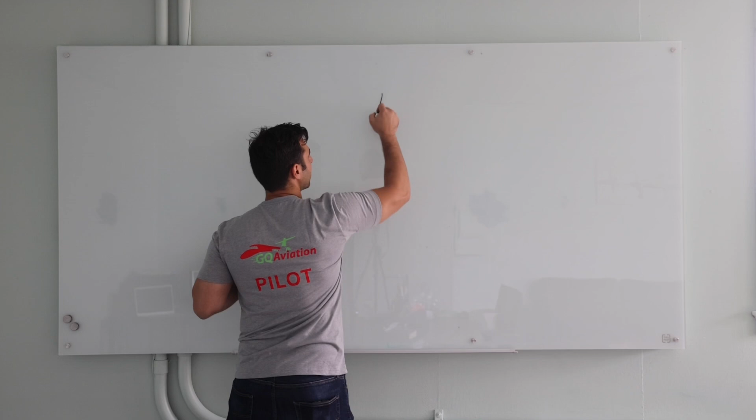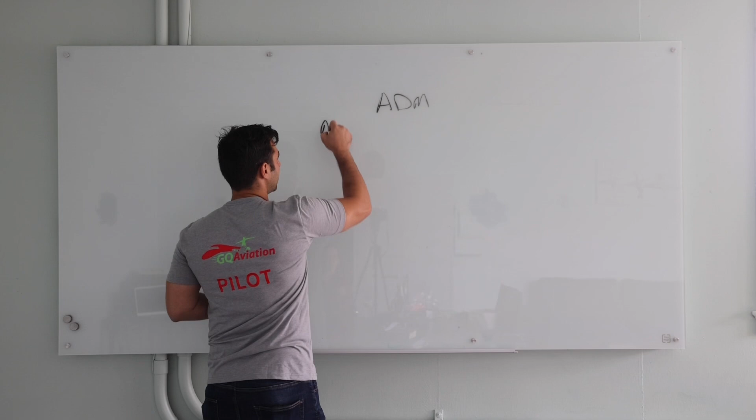Today's ground lesson is going to be about ADM. Just a heads up, there's an acronym for everything in aviation, and ADM stands for Aeronautical Decision Making. I'm going to write that down because it's important.

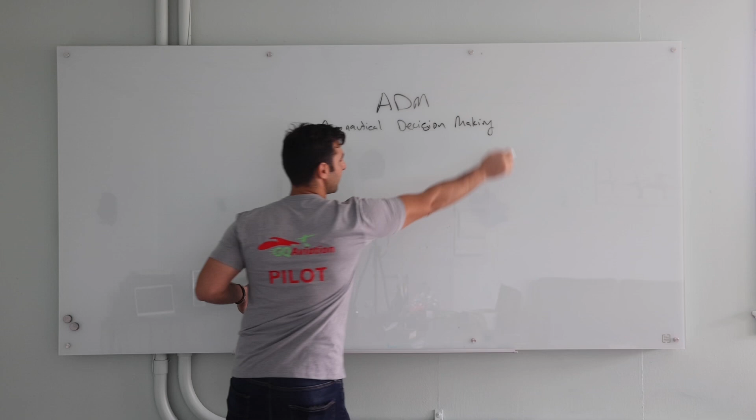Aeronautical decision making is basically your go or no-go decision. Are we going to fly today or not? How do we know if we're going to go fly? What factors come into play? What considerations do we have to take? When we go flying, we have to think about things like us, the aircraft, outside, restrictions, weather. But to put it all in one word, there's an acronym for that. We are going to use the acronym PAVE.

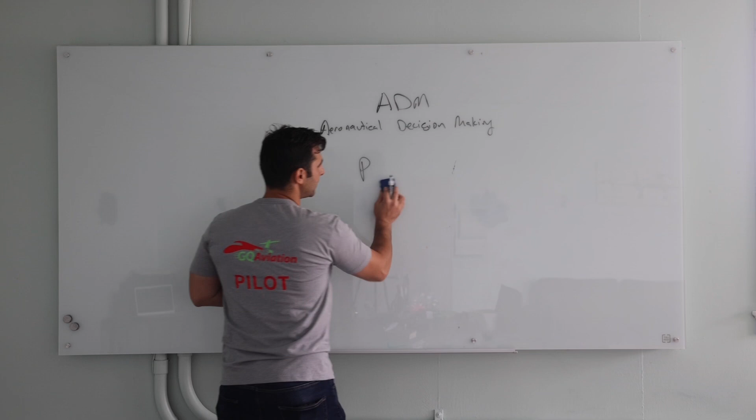Before you come to fly, run this acronym against yourself and against the factors that are out there, and then make the decision if you should fly that day or not. Let's start with the P. The P in PAVE stands for the most important person, which is pilot.

You're going to run an assessment of yourself to know if you are fit to fly that day or not. There are different factors to think about, but to make it easy we also have an acronym for that, and we call it I'm Safe.

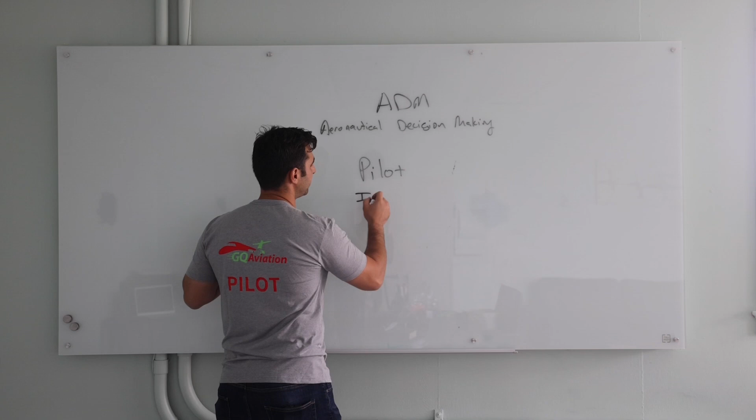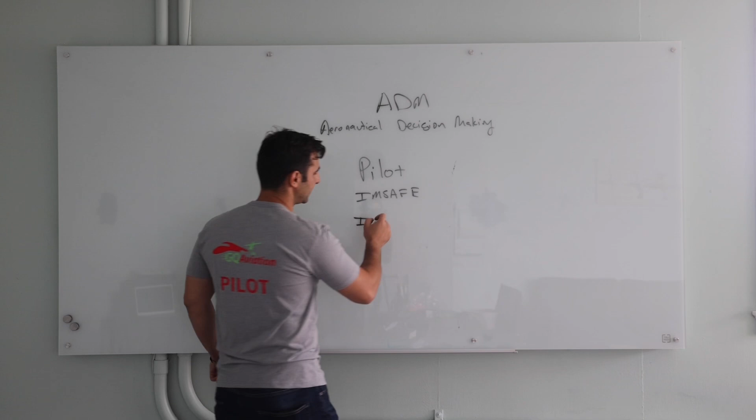This is I'm Safe vertically, but we're going to list it horizontally. The I stands for illness. So if you're sick and you think you could handle it on the ground, you might not be able to handle it in the air.

An example of this: if you have some sinus pressure on the ground, you might be able to deal with it, but as you get into the air with lower pressure, it might start hurting even more. When you're training, you'll always have an instructor there to back you up, but you don't want to get into the habit of testing the limits. If you're sick, you know you shouldn't be going out. Flying the plane is not the best decision to make. The M is medication.

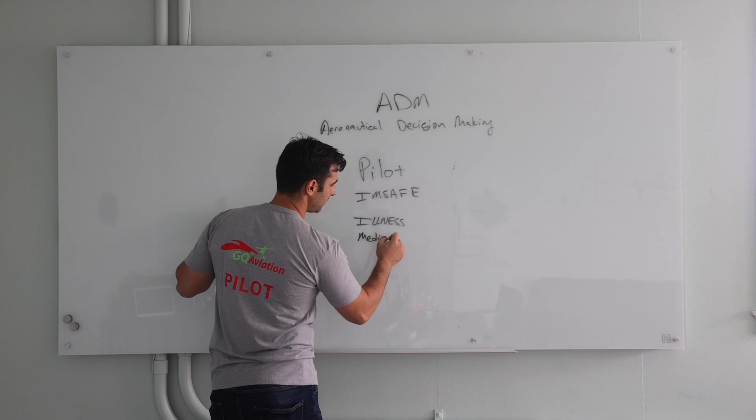There's a list of medications that the FAA does not want you flying with. You want to look those up, and if you think you're on one, you probably shouldn't be flying. Other than that, if the medication says do not operate heavy equipment, you probably shouldn't be operating an aircraft, even though these small single-engine aircraft are probably not as heavy as your car.

But if you think you normally take a medication and you're fine with it, and it says it causes drowsiness but you never get drowsy, when you get into the sky that might change. So you don't want to risk it. If you're on a medication that could adversely affect your abilities to control or handle an aircraft, don't go flying.

S is stress. Talking about stress will lead up to this: let's talk about accidents. Normally most accidents in aviation happen because the pilot made more than one small mistake. So it's normally not a big mistake, it's normally a series of small mistakes.

As a new pilot, and as a pilot in general, if you come in stressed out and take the aircraft and you have a small issue, such as an alternator going out, which is not a big deal, you have about 20 minutes to get it down on the ground. But you might forget about that and make another mistake thinking about this, and then one mistake leads to another, and then maybe to an unfortunate incident or accident. So if you're stressed out, the place to blow off steam is not the aircraft.

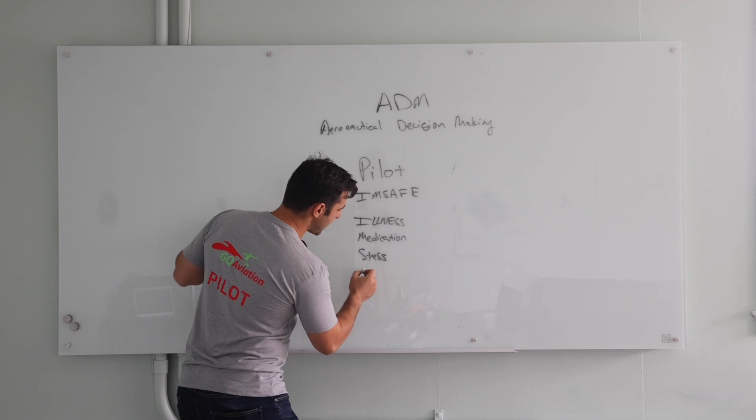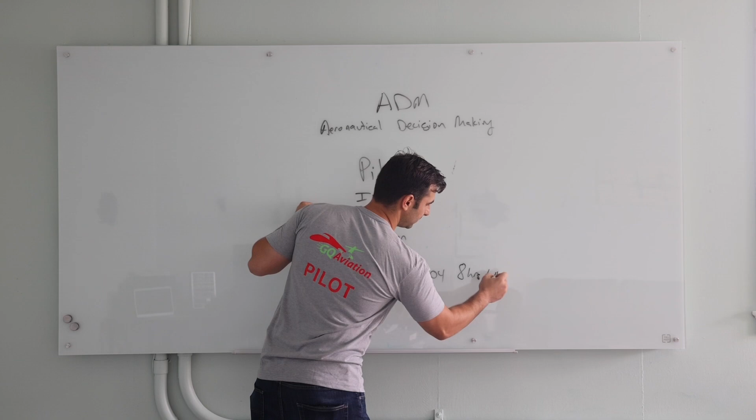A stands for alcohol, which is self-explanatory. But the FAA wants you to know that your blood alcohol content cannot be more than 0.04. We also have a saying: 8 hours bottle to throttle. So from the last drink, you've got to wait 8 hours before you can operate an aircraft.

Taking this a step further, if you're in training and you're hungover, you probably don't want to come. Training gets expensive, and if your instructor doesn't pick up on it in time and you go flying, well, you're spending hundreds of dollars and it's probably going to be a waste of your time. The instructor will have to turn the plane around and bring it back, and you'll need to wait for your next lesson to restart.

The F is fatigue. We're going to talk about fatigue: if you're tired or hungry, solve those two situations before you show up to fly. If you're tired, get a nap, get some sleep in. If you're hungry, grab a bite. A cranky person in an aircraft is not the best of people in a plane. It's supposed to be a good time, so feed the belly.

And the E is emotion. When it comes to emotion, be level-headed when you come into the aircraft to operate. We want a level environment, just to keep it simple. Run this checklist against yourself before you show up. As long as you do not abuse this checklist, your instructor will understand if anything comes up, even if it's last minute. Bring it to our attention, and you call out of the flight.

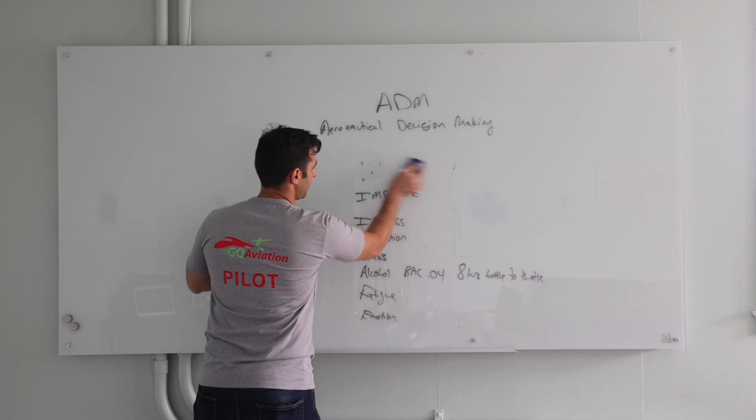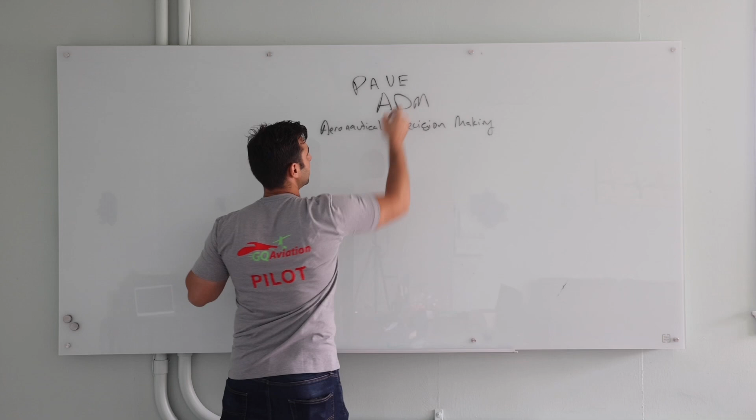So I'm going to write PAVE up here, that way we don't forget it. The A in PAVE is going to be aircraft, abbreviated AC. When it comes to the aircraft, it should be properly inspected, legally inspected. It should be in good condition before you come fly it.

Any normal person walking up to an aircraft will know, even if it was supposed to be inspected properly. If it has a low tire or a flat tire, you know that it's not going up to fly. If it has a dent in the wing or open panels underneath the wing, or if there's a leak next to the wheels, it should be inspected by a mechanic before you go. So take a look at the aircraft, make sure it jives for your flight, make sure it looks safe, and even after you start it, make sure your run-up jives.

Don't scratch anything off just because 90% of the time you showed up, it was a good aircraft, and now this one gauge is low, it will be fine. It won't be fine. Let a mechanic say it will be fine, then come and take it. Planes are a dime a dozen, so you could just come, park a plane, and take another one. We want to be safe here. Other than that, let's talk about the inspections the plane needs to have.

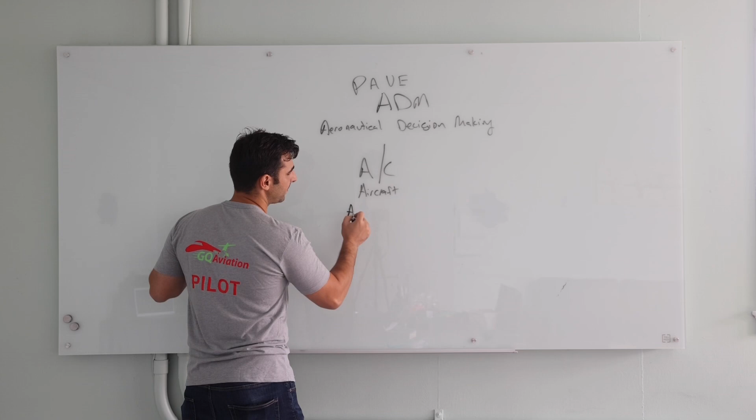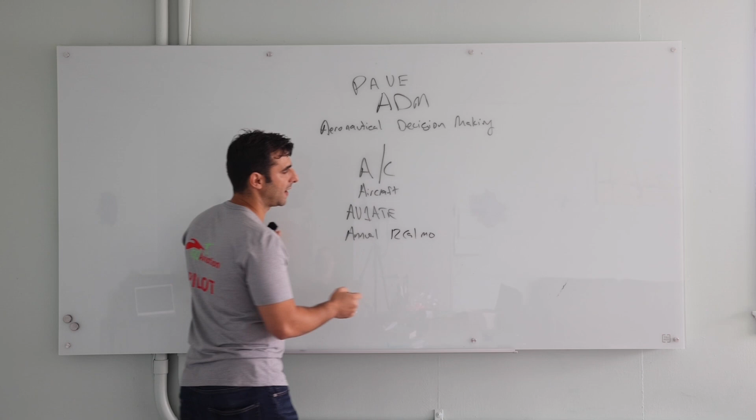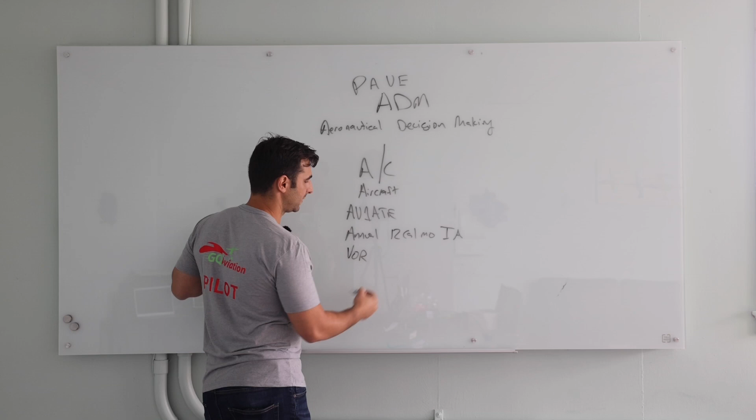It comes in an acronym, and it's called AVIATE. The A stands for annual. Your aircraft needs to be inspected every 12 calendar months by an inspection authorization. That's a type of mechanic in aviation. The V is a VOR check. It's navigational equipment, your VOR receiver. And this needs to be inspected every 30 days.

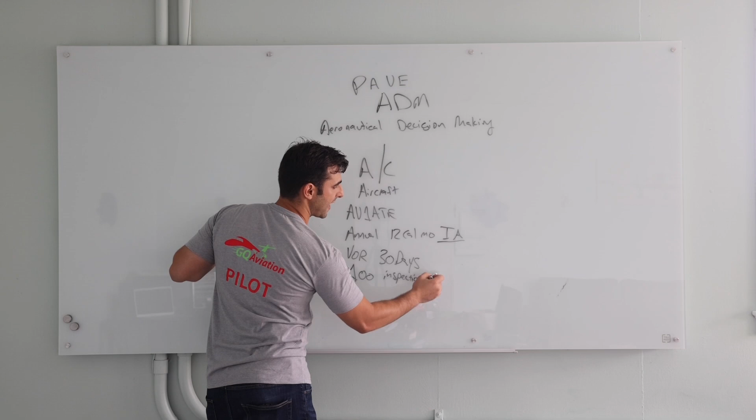The I is actually a 1, and it stands for the 100-hour inspection. This can be done by an IA or an A&P. And an IA is an A&P. A 100-hour inspection needs to be done every 100 hours the plane flies, and only if it's for hire. So if you own your own personal aircraft and you just fly personal trips, nothing for work, you're not renting the plane out, the plane's not on a charter service, you do not need to do this. But it is a good idea that a mechanic sees the plane every 100 hours.

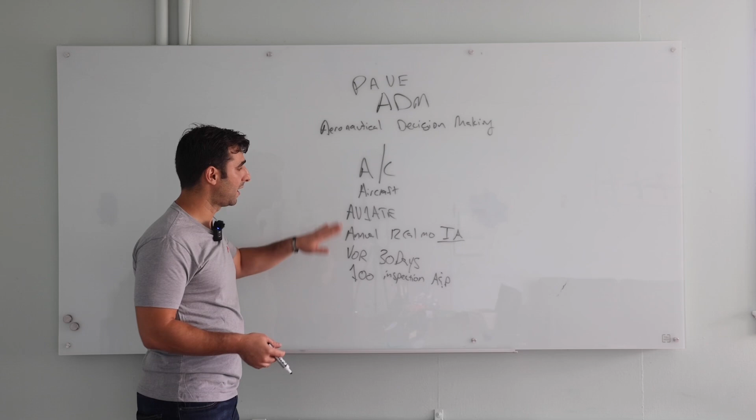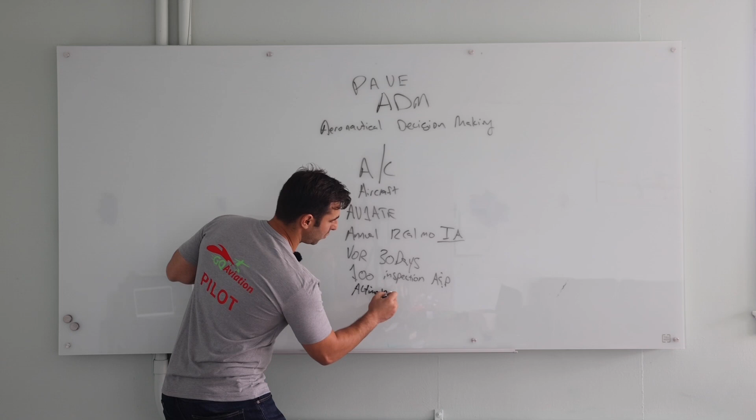A 100-hour could be included in an annual. So if an annual is signed off, they'll normally sign off a 100-hour. But it won't happen the other way around. If a 100-hour is signed off, an annual is not signed off. After that, the other A is altimeter, which is actually the pitot-static system. And this needs to be inspected every 24 calendar months.

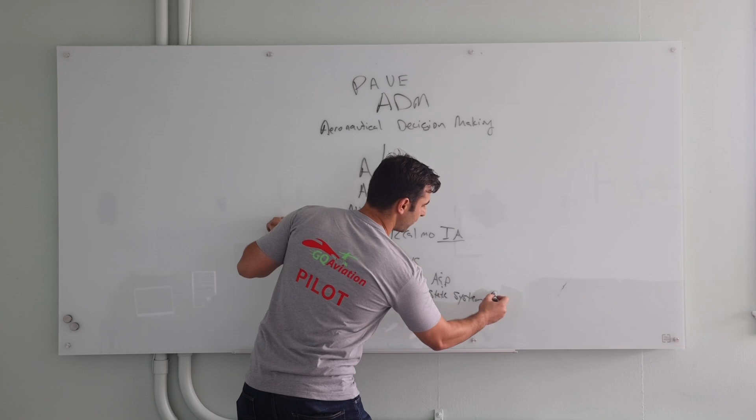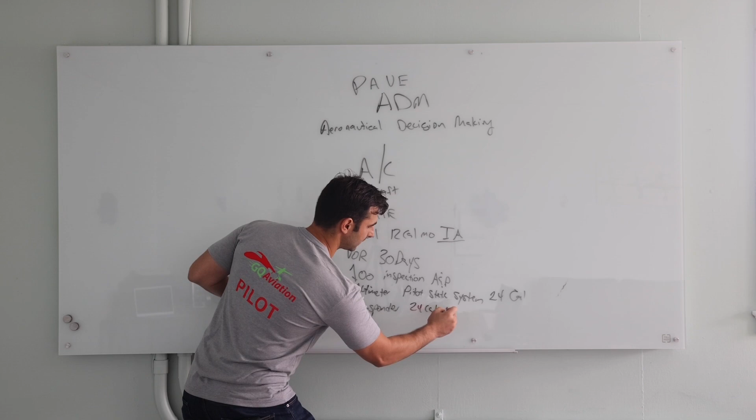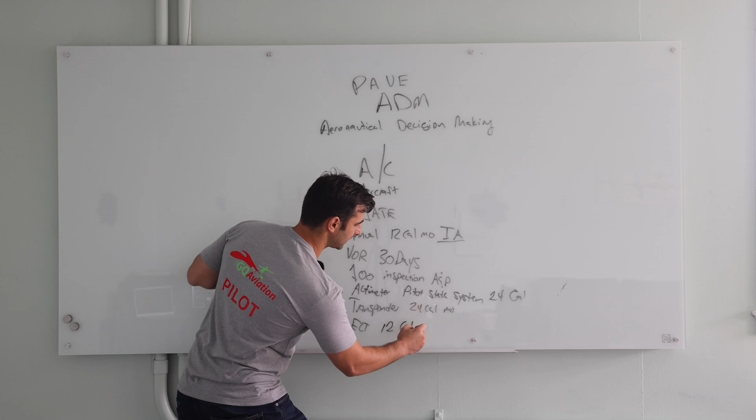Then you have the T, which is the transponder, which also needs to be inspected every 24 calendar months. And we have the E, which is the ELT, an emergency locator transmitter. That needs to be inspected every 12 calendar months, and the battery replaced as necessary. The battery needs to be replaced either at the expiration date or whenever 50% of the battery is used, whether it was actually used or for testing. If you drained it halfway down, you need to replace that battery.

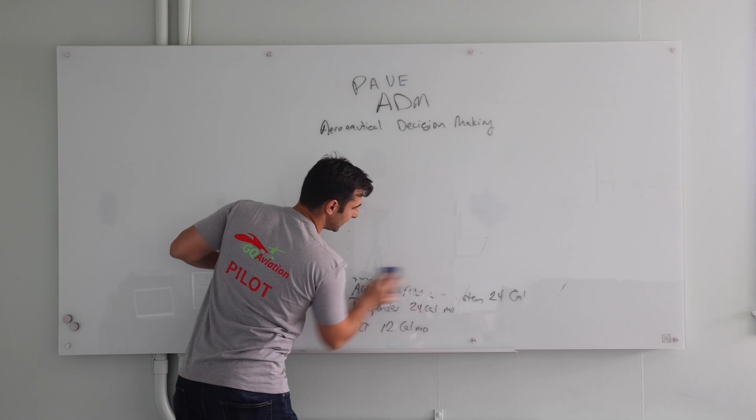So these are the inspections that the aircraft requires. Now, if a mechanic tells you they're done, but you walk up to the plane and there's a discrepancy, a piece missing, or a big piece missing, leave that plane alone, walk back, and get another plane. So that's the aircraft. The V in PAVE is actually for environment.

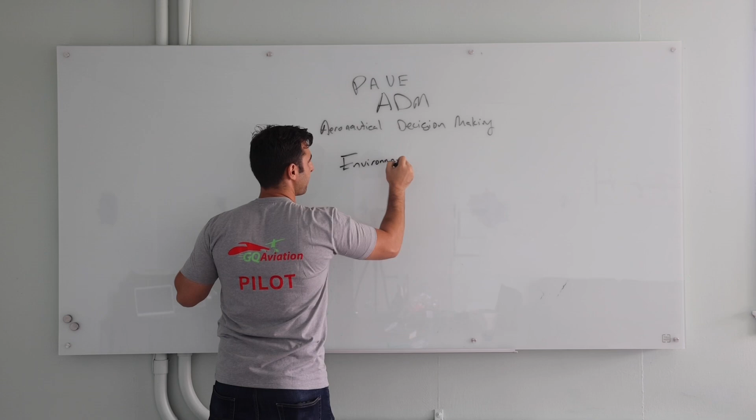Now, what can the environment include? It could include the big one, which is weather. Should we be flying in this weather? Today, we do have a rainy day. It's cloudy. If you're not instrument rated, it's probably not a good idea to go flying today. If you are instrument rated, but not proficient, it's probably not a good idea either. But let's assume that we're just VFR pilots, basically only flying by what we see visually outside. It's clear that we're not going to fly today.

But if we show up and the cloud deck is lower than what we personally feel comfortable with, which is our personal limitations, maybe we won't go. Maybe I'll set the standard for myself to fly only if the cloud deck is at least 3,000 feet. Also, if there are winds I'm not comfortable with, and I only have one runway, wind coming off the side will create a crosswind. I'm not comfortable with a crosswind of more than 10 knots, so I won't go fly that day. Other than that, the other normal weather phenomena. But taking it a step forward, what if there are restrictions?

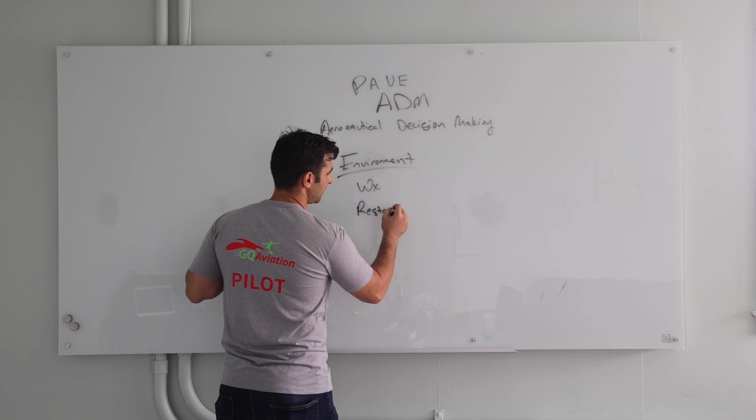Restrictions in the area. Some restrictions you can fly through if you know how to navigate them or if you know how to get the proper clearances. If we're not comfortable getting these proper clearances, we probably shouldn't be going that day.

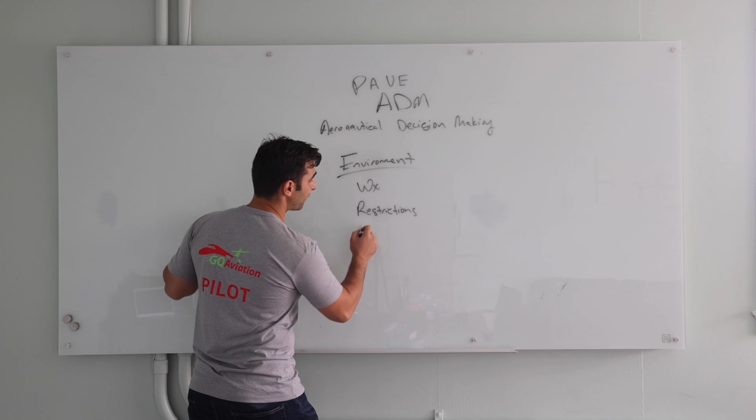Performance of the aircraft. Now, are we taking off of a shorter runway, a smaller runway? Do I feel comfortable clearing this obstacle? Am I around mountains? Do I feel comfortable with the environment of the airport itself? Am I leaving a Bravo or a more busy airport? Should I bring somebody with me to help me out?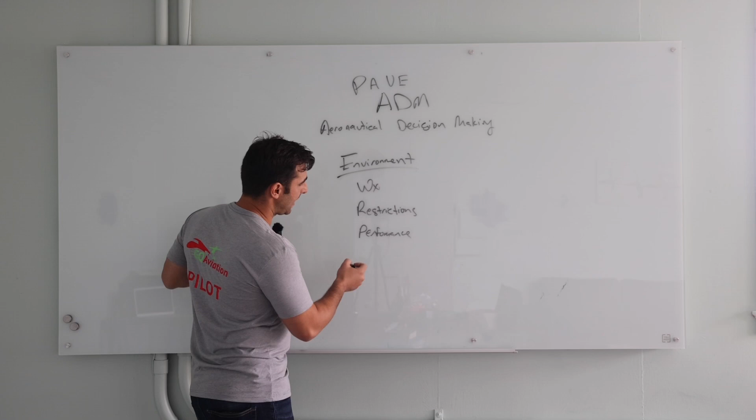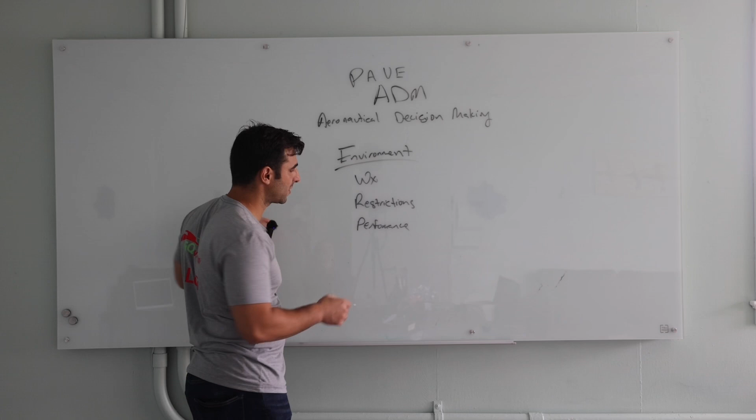So we want to take into consideration the performance of the aircraft. Can I clear maybe an obstacle at the end of the runway? Do I feel comfortable doing it myself? You want to take into consideration your own capabilities. Well, there was one more that I wanted to say. Coming back to the environment and sticking it together with somewhat of the aircraft, let's include aircraft in environment as well.

So let's say we have a new aircraft. If we're not familiar with this new aircraft, if it's not similar to the ones that we used to fly, maybe we want to take somebody with us and make the environment of the aircraft more comfortable for us. Not necessarily an instructor at that point if you're a full-on pilot, but perhaps somebody that's flown the aircraft before, that's familiar with the systems and how to operate the aircraft, and to give us pointers on that. But if you do need, or if you do feel more comfortable, take an instructor with you.

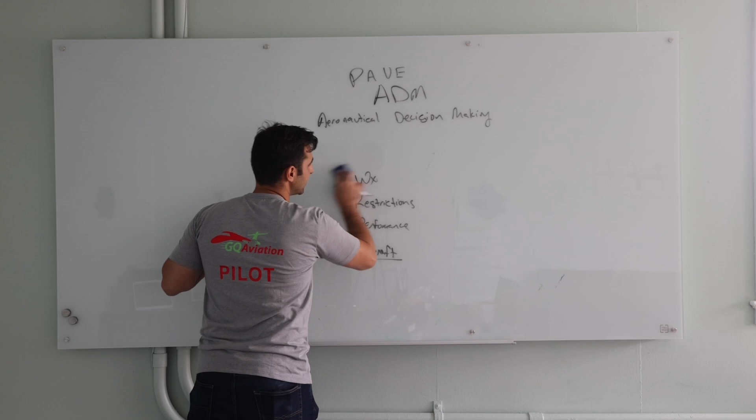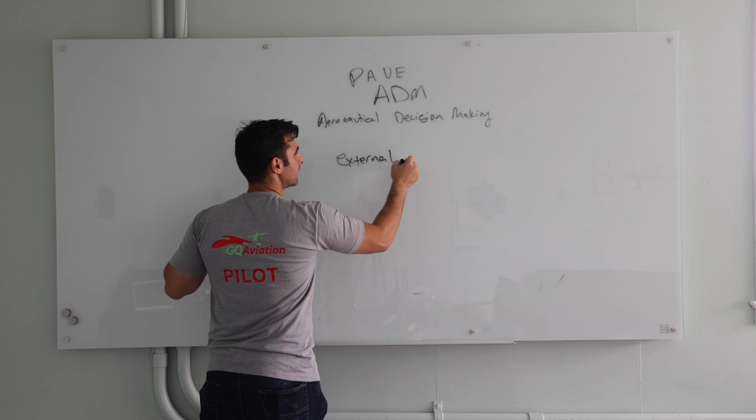So that's environment, and anything else that you can think of about the environment that might adversely affect your flight for that day. The last thing on PAVE will be the E, which is external pressures. Now, a lot of people don't think about this, but it is very, very, very serious. So external pressures. What do we mean by external pressures? We mean that we don't want anybody to force us to fly. We don't want anybody to convince us that we should fly or that we could fly or push us beyond our personal limitations that we've set for ourselves.

For instance, let's say I'm a freshly rated pilot, and I'm talking to my friends, and I told them I just got my pilot's license, and let's go up for a flight, and then we schedule a day. The day is supposed to be full on clear. We show up at the airport, and I feel a breeze coming through. I pre-flight the plane, and maybe that breeze turns into a gusting wind. And as a fresh pilot, I haven't flown in 20 or 30 knot winds, and I don't feel comfortable doing that. It's my responsibility at that point to pull the plug on this flight, to tell my friends, hey, let's not go. Even if some of my friends might say, hey, you're a pilot, you could handle this, let's do it. We trust you, we have faith in you.

And they actually trust you and have faith in you to make the right decision, because at that point, it's not your instructor you're flying with anymore or another pilot that maybe has more experience in those types of winds or those type of conditions. You are the person that everybody is relying on at that point. So it's your responsibility to make the right decision.

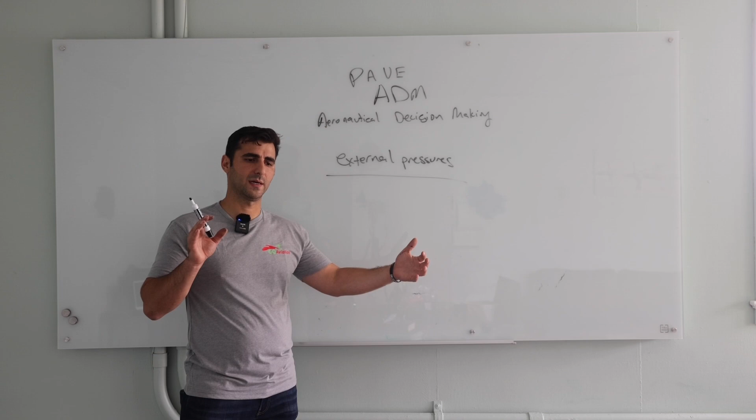Also, let's talk about in the air as well when it comes to external pressures. If you're flying with somebody else and maybe there's a short runway that you're not comfortable with and you don't want to land there, maybe it's a full-on crosswind or an obstacle prior to it on the more favorable runway, and you want to just turn back and go home, you have the fuel, or go to another airport, and your partner there is telling you, hey, no, we could do it. It's your responsibility to say, hey, I don't feel comfortable doing this. Let's just go back. All right, don't let anybody force you to do anything in this business or in this industry that you feel uncomfortable with.

This is on a personal level, and then when we're private pilots, normally this stuff evolves as you get into the industry. Some people might say that companies try to convince you to fly when you're tired. Well, tired was the beginning of the lesson: IMSAFE. At that point, it's your responsibility to say, hey, I'm tired, I'm fatigued, I cannot do this flight, I cannot safely perform this trip. At that point, it's not just you, it's you and everybody that's behind you that's counting on you to make this flight safely to the destination. And if you cannot do that, it is your responsibility to pull the plug. So don't let anybody force you to ever do a flight that you don't feel comfortable with.

And that's external pressures. And that, all in all, is PAVE. Remember, pilot, aircraft, environment, and external pressures. Think about what else could apply. Get to know this stuff real well. It goes with you throughout your entire aviation career. And remember, it's always an option to take off, but it's not an option to land. If you take off, you're going to need to land the aircraft. So make the right decision.